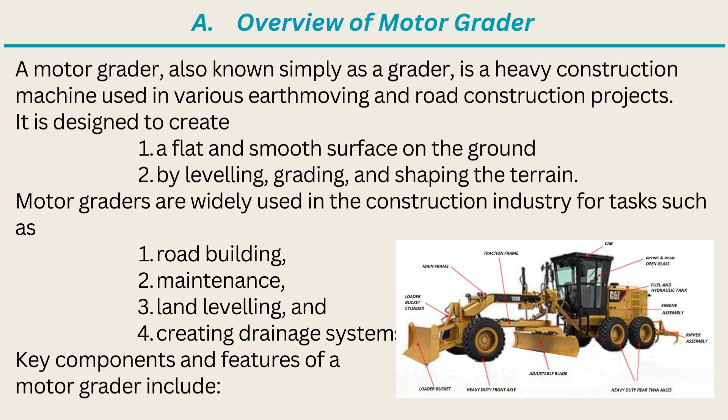A motor grader, also known simply as a grader, is a heavy construction machine used in various earthmoving and road construction projects. It is designed to create a flat and smooth surface on the ground by leveling, grading, and shaping the terrain. Motor graders are widely used in the construction industry for tasks such as road building, maintenance, land leveling, and creating drainage systems. Key components and features of a motor grader include:

1. Blade. The blade is the primary working component of a motor grader. It is a large, flat, and adjustable steel plate mounted under the machine's frame. The blade can be raised, lowered, tilted, and rotated to cut, move, and spread material. Motor graders typically have one main blade and sometimes additional front-mounted blades for more precise grading.

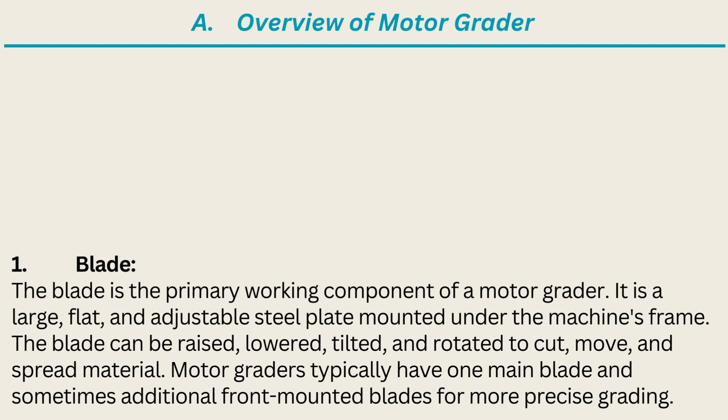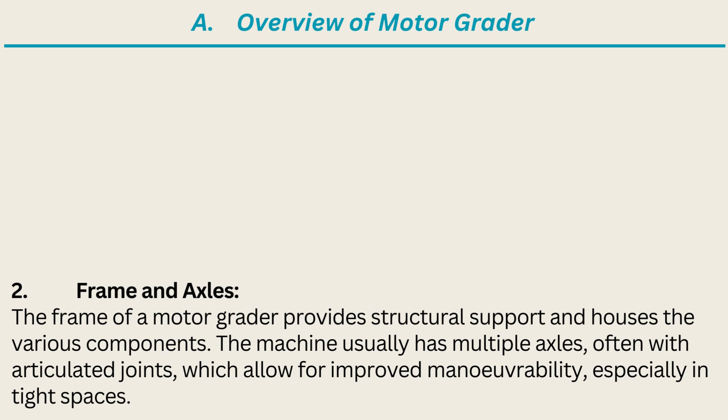2. Frame and axles. The frame of a motor grader provides structural support and houses the various components. The machine usually has multiple axles, often with articulated joints, which allow for improved maneuverability, especially in tight spaces.

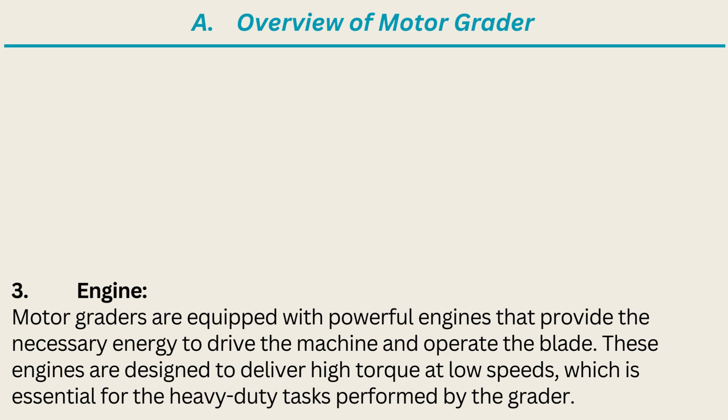3. Engine. Motor graders are equipped with powerful engines that provide the necessary energy to drive the machine and operate the blade. These engines are designed to deliver high torque at low speeds, which is essential for the heavy-duty tasks performed by the grader.

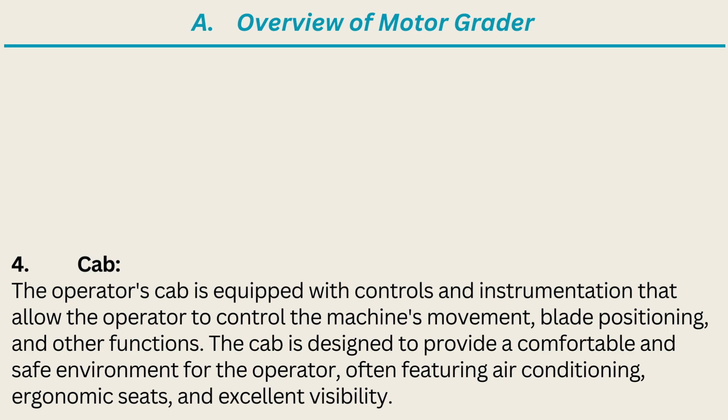4. Cab. The operator's cab is equipped with controls and instrumentation that allow the operator to control the machine's movement, blade positioning, and other functions. The cab is designed to provide a comfortable and safe environment for the operator, often featuring air conditioning, ergonomic seats, and excellent visibility.

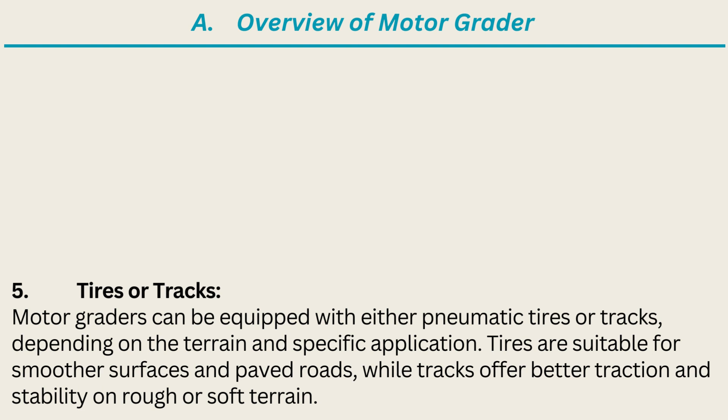5. Tires or tracks. Motor graders can be equipped with either pneumatic tires or tracks, depending on the terrain and specific application. Tires are suitable for smoother surfaces and paved roads, while tracks offer better traction and stability on rough or soft terrain. 6. Hydraulic system.

The hydraulic system powers the blade's movement, allowing it to be raised, lowered, and angled as needed. This system provides precise control over the grading process.

7. Ripper. Some motor graders have a rear-mounted ripper, a set of toothed shanks that can penetrate and break up compacted or rocky soil. The ripper is useful for preparing the ground before grading.

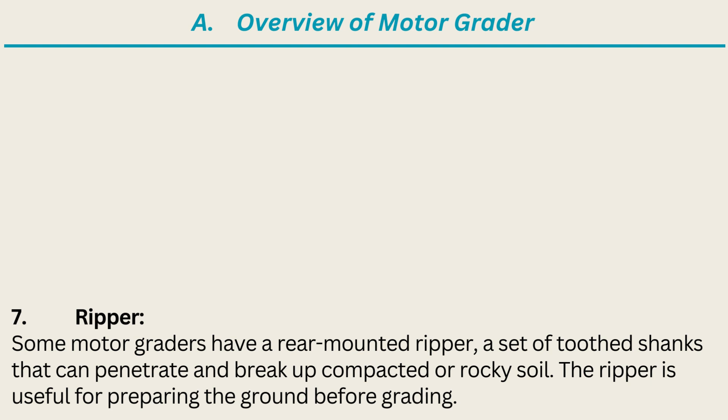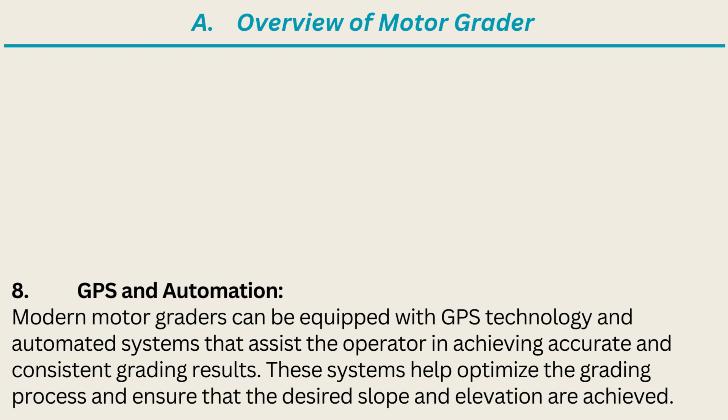8. GPS and automation. Modern motor graders can be equipped with GPS technology and automated systems that assist the operator in achieving accurate and consistent grading results. These systems help optimize the grading process and ensure that the desired slope and elevation are achieved.

Motor graders should be operated by skilled operators to achieve the desired grade and finish. Their versatile capabilities make them essential tools in various construction and road maintenance projects, contributing to the development of efficient and safe transportation networks. B. Components and systems of a motor grader.

A motor grader consists of various components and systems that work together to perform grading, leveling, and earthmoving tasks. Here's an overview of the key components and systems of a motor grader.

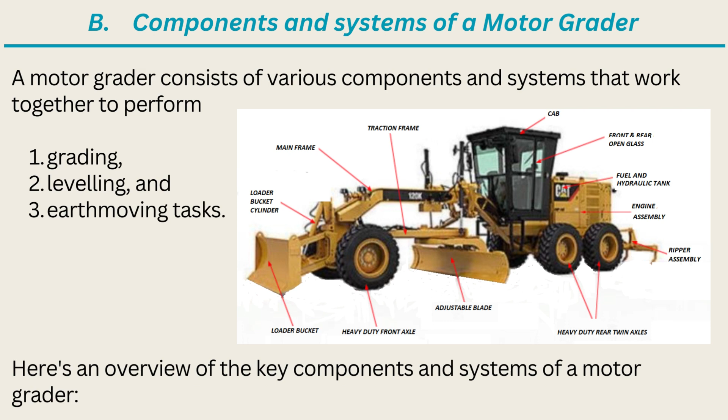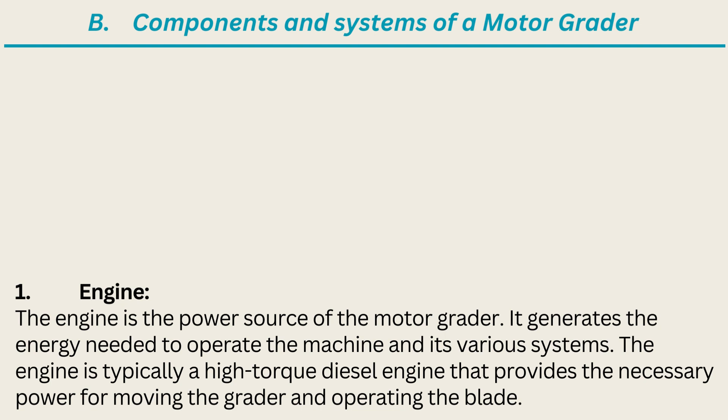1. Engine. The engine is the power source of the motor grader. It generates the energy needed to operate the machine and its various systems. The engine is typically a high-torque diesel engine that provides the necessary power for moving the grader and operating the blade.

2. Transmission. The transmission system transfers power from the engine to the wheels or tracks, allowing the motor grader to move forward, backward, and turn. It often includes multiple gears and can be manual, automatic, or a combination of both.

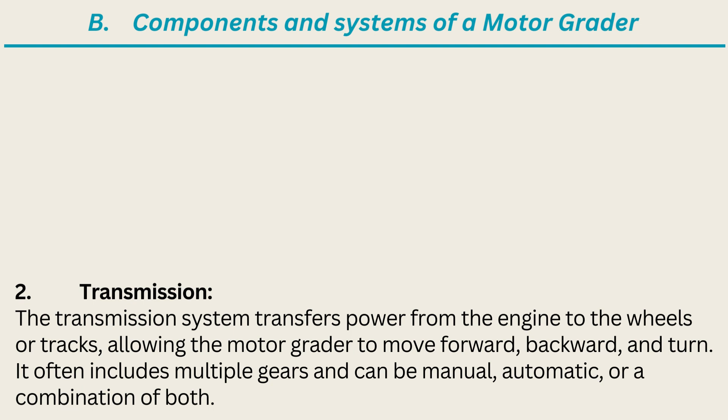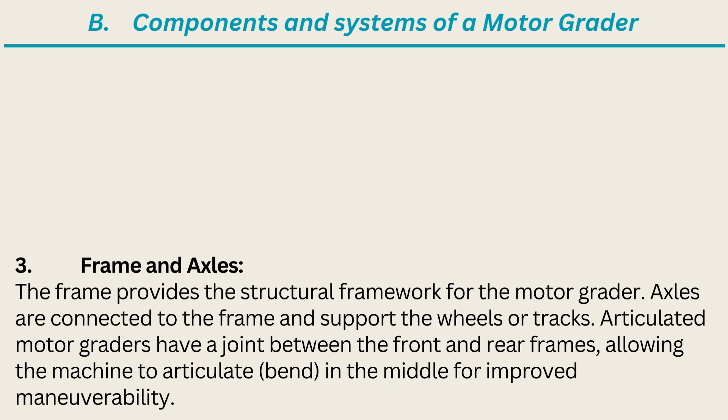3. Frame and axles. The frame provides the structural framework for the motor grader. Axles are connected to the frame and support the wheels or tracks. Articulated motor graders have a joint between the front and rear frames, allowing the machine to articulate, bend, in the middle for improved maneuverability.

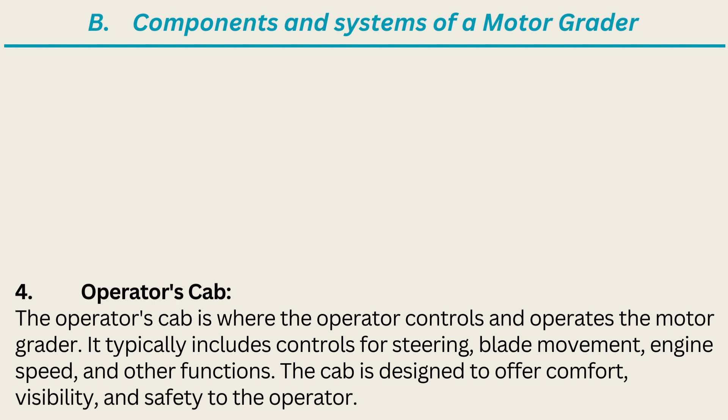4. Operator's cab. The operator's cab is where the operator controls and operates the motor grader. It typically includes controls for steering, blade movement, engine speed, and other functions. The cab is designed to offer comfort, visibility, and safety to the operator. 5. Blade.

The blade is the key working component of the motor grader. It is mounted under the machine's frame and can be raised, lowered, tilted, and rotated to perform grading and leveling tasks. The blade can be a single moldboard or a combination of front and rear blades.

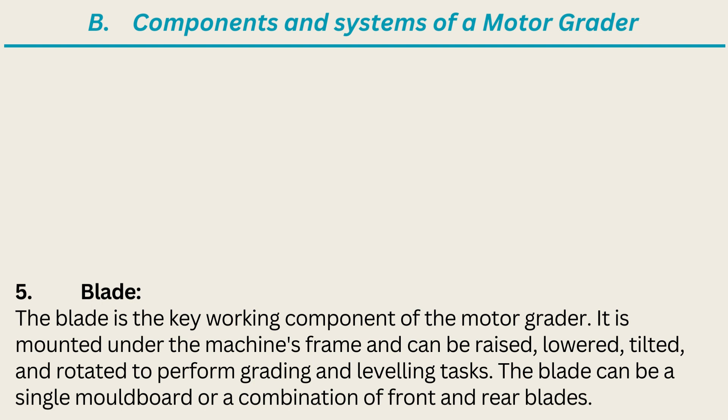Hydraulic system: the hydraulic system powers the movement of the blade and other attachments. It uses hydraulic fluid to generate force, allowing precise control over the blade's position and angle.

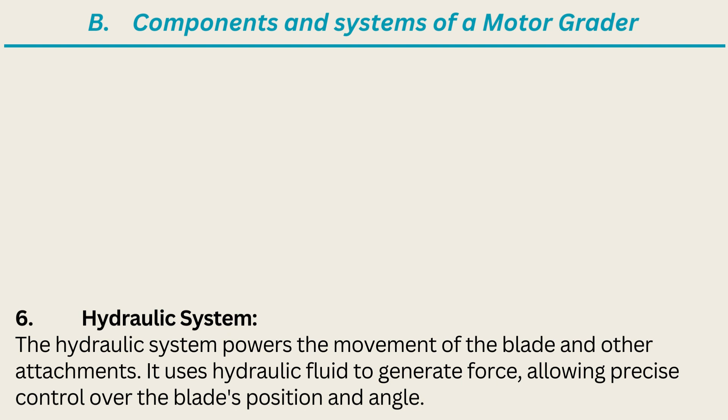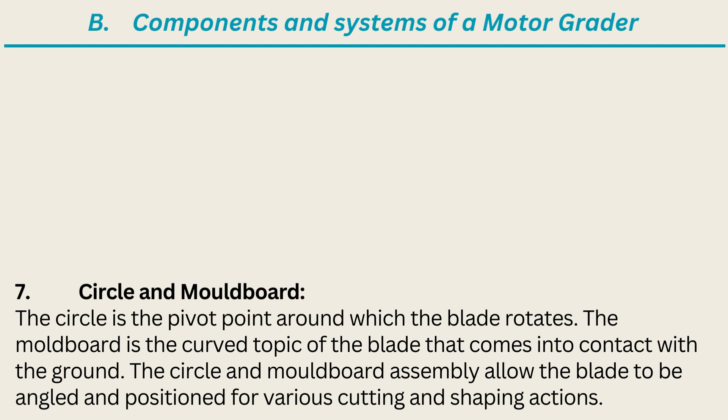Circle and moldboard: the circle is the pivot point around which the blade rotates. The moldboard is the curved part of the blade that comes into contact with the ground. The circle and moldboard assembly allow the blade to be angled and positioned for various cutting and shaping actions.

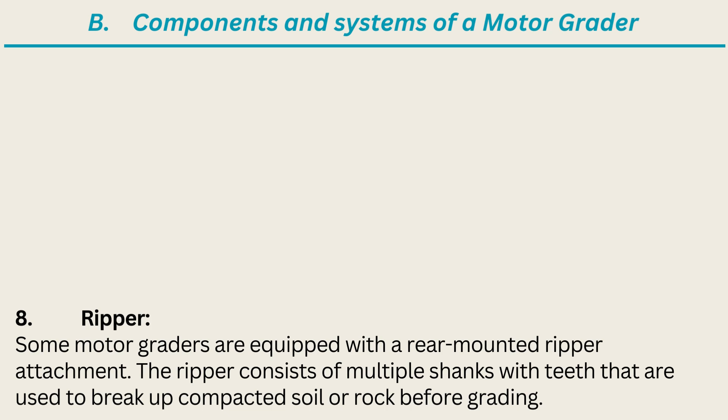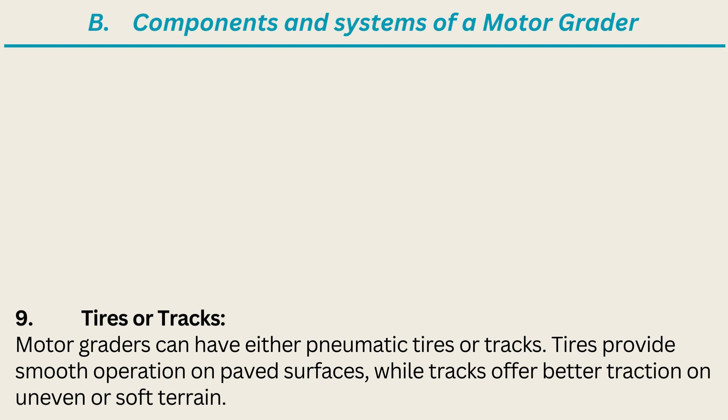Tires or tracks: motor graders can have either pneumatic tires or tracks. Tires provide smooth operation on paved surfaces, while tracks offer better traction on uneven or soft terrain.

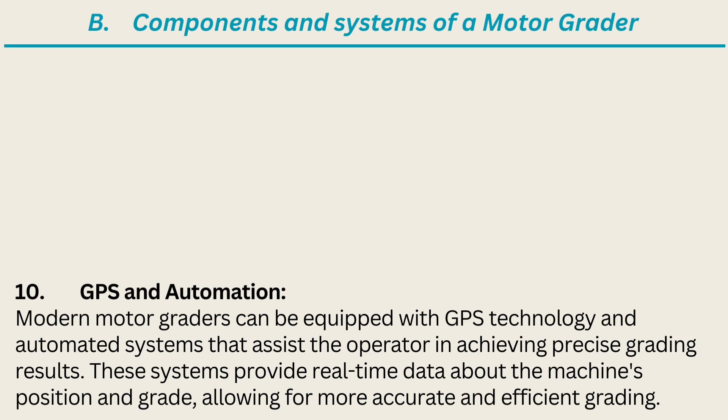GPS and automation: modern motor graders can be equipped with GPS technology and automated systems that assist the operator in achieving precise grading results. These systems provide real-time data about the machine's position and grade, allowing for more accurate and efficient grading.

Cooling system: the cooling system regulates the temperature of the engine and other components to prevent overheating. It typically includes a radiator and a fan.

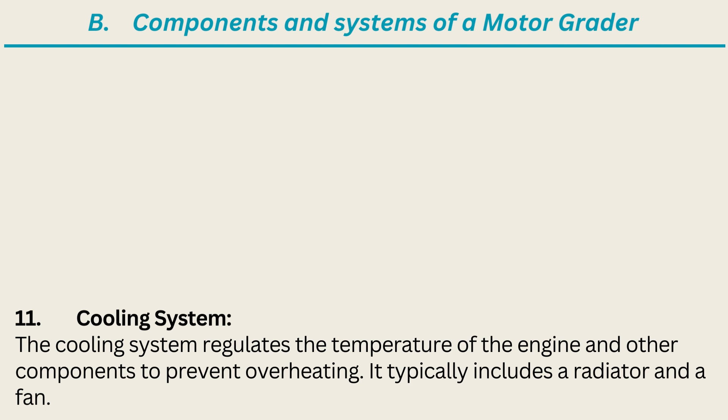Electrical system: the electrical system powers various components, including lights, gauges, controls, and electronic features in the operator's cab.

Brakes: brakes are important for controlling the motor grader's speed and stopping safely.

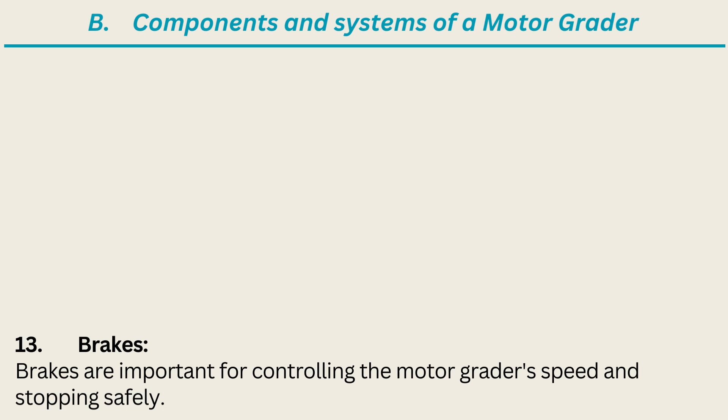Steering system: the steering system allows the operator to control the direction of the motor grader. Articulated graders often have unique steering mechanisms that enable them to bend in the middle.

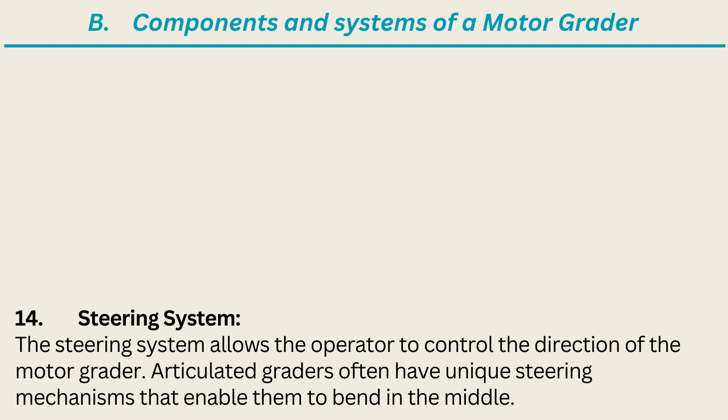Exhaust system: the exhaust system removes waste gases produced by the engine and directs them away from the operator and the machine. These components and systems work in harmony to enable motor graders to efficiently perform grading, leveling, and earth-moving tasks on construction sites, road projects, and other similar applications.

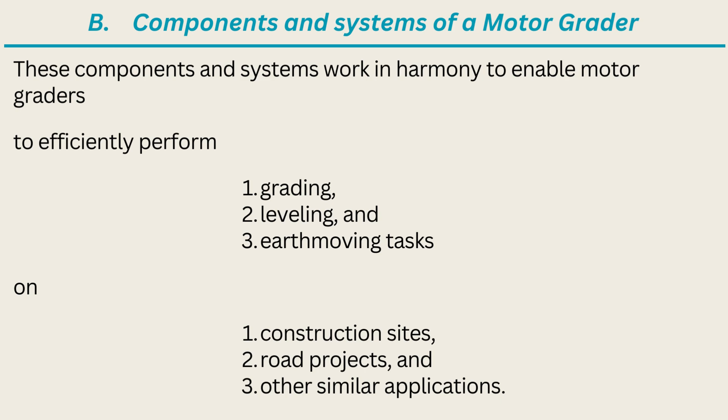Benefits of motor grader. Motor graders offer a range of benefits that make them essential equipment in construction, road maintenance, and earth-moving projects. Here are some of the key benefits of using motor graders.

Precise grading and leveling. Motor graders are designed to provide precise control over grading and leveling operations. Their adjustable blades and hydraulic systems allow operators to achieve accurate slopes, elevations, and smooth surfaces, ensuring proper drainage, road safety, and overall project quality.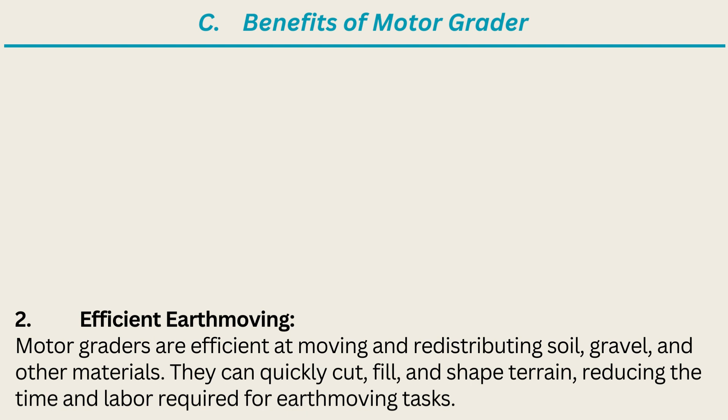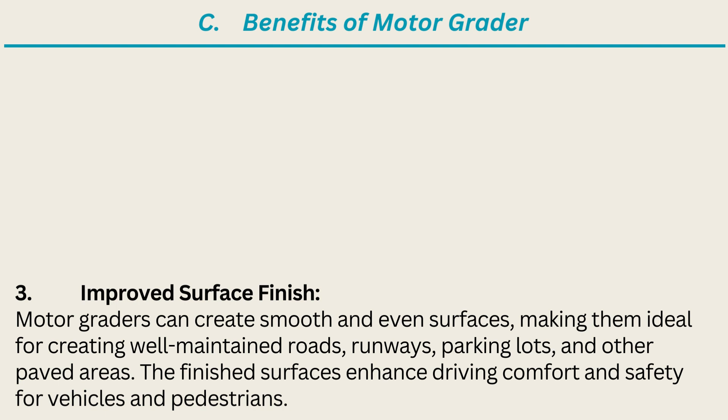Improved surface finish: motor graders can create smooth and even surfaces, making them ideal for creating well-maintained roads, runways, parking lots, and other paved areas. The finished surfaces enhance driving comfort and safety for vehicles and pedestrians.

Enhanced safety: well-maintained roads and surfaces contribute to safer driving conditions by reducing potholes, ruts, and uneven surfaces that can lead to accidents. Proper grading and drainage also help prevent water accumulation, reducing the risk of hydroplaning.

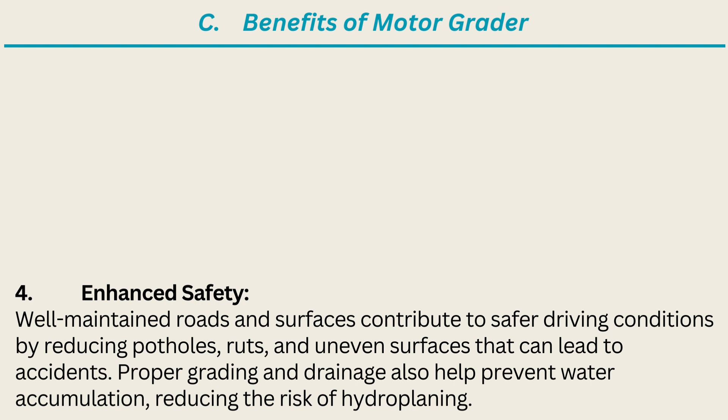Time and cost savings: motor graders are efficient machines that can complete grading and leveling tasks relatively quickly compared to manual methods. This efficiency translates into time and labor savings, ultimately reducing project costs.

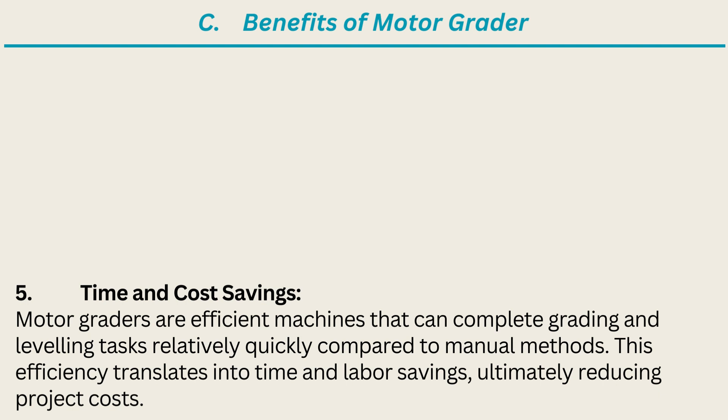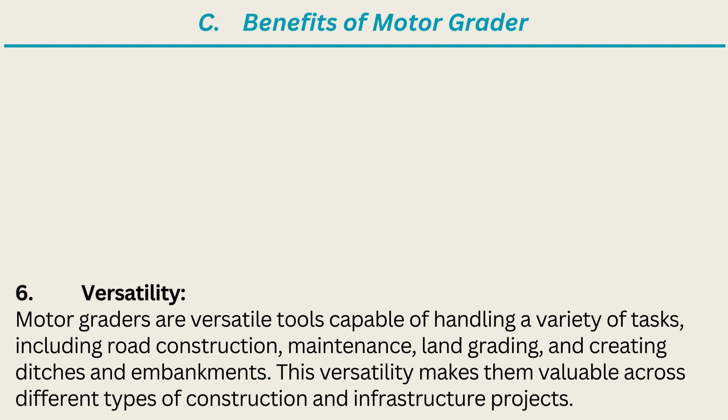Versatility: motor graders are versatile tools capable of handling a variety of tasks, including road construction, maintenance, land grading, and creating ditches and embankments. This versatility makes them valuable across different types of construction and infrastructure projects.

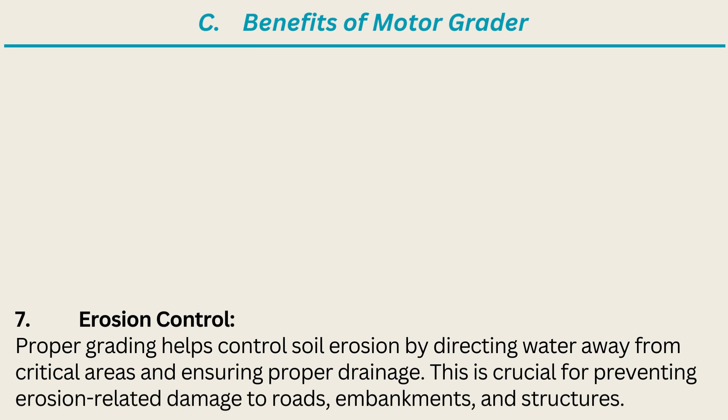Erosion control: proper grading helps control soil erosion by directing water away from critical areas and ensuring proper drainage. This is crucial for preventing erosion-related damage to roads, embankments, and structures.

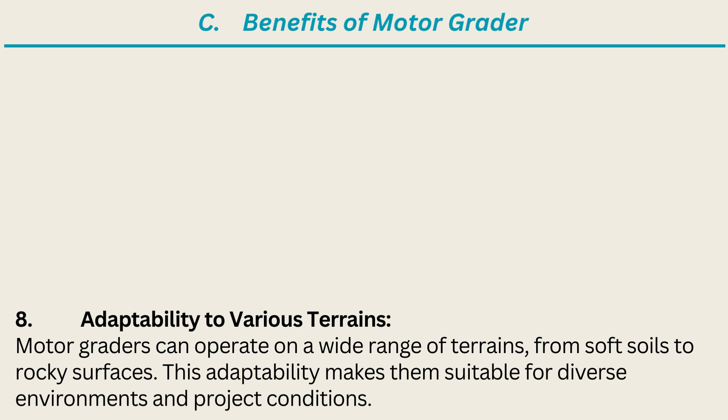Adaptability to various terrains: motor graders can operate on a wide range of terrains, from soft soils to rocky surfaces. This adaptability makes them suitable for diverse environments and project conditions.

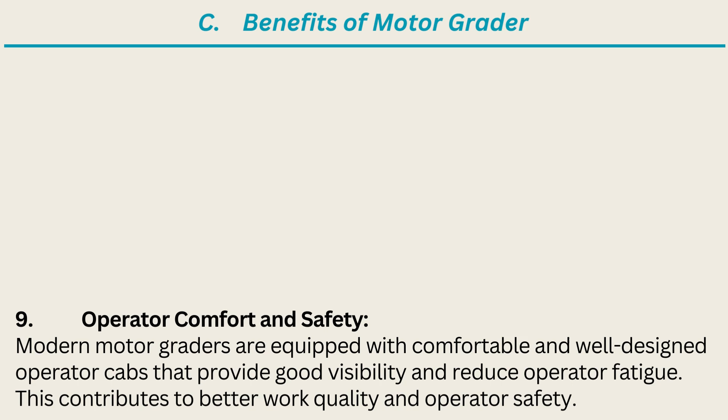Operator comfort and safety: modern motor graders are equipped with comfortable and well-designed operator cabs that provide good visibility and reduce operator fatigue. This contributes to better work quality and operator safety.

GPS and automation integration.

Many motor graders can be equipped with GPS technology and automation systems that enhance accuracy and consistency in grading operations. These technologies improve efficiency and reduce the chances of human error.

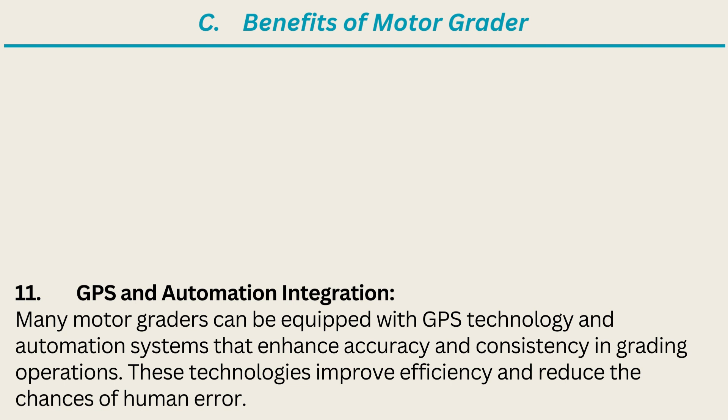12. Environmentally friendly. Efficient grading and leveling reduce the need for excessive excavation and fill, leading to less material waste and a smaller environmental footprint.

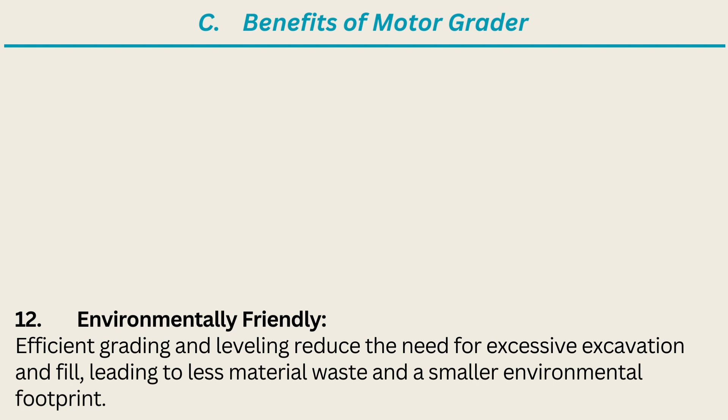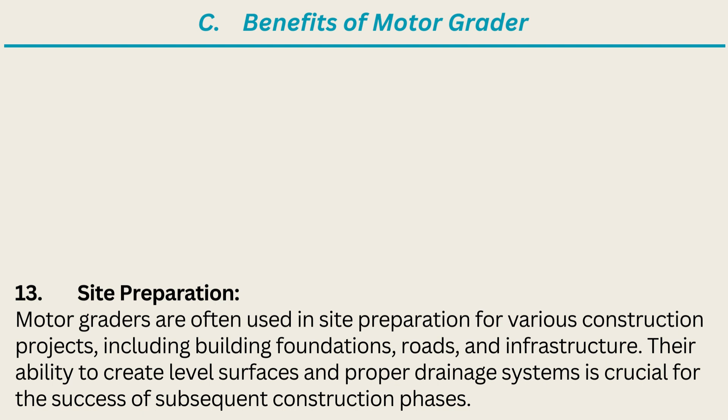13. Site preparation. Motor graders are often used in site preparation for various construction projects, including building foundations, roads, and infrastructure. Their ability to create level surfaces and proper drainage systems is crucial for the success of subsequent construction phases.

In summary, motor graders play a crucial role in achieving well-designed and properly maintained infrastructure, contributing to safer roads, efficient transportation networks, and overall project success in the construction and earthmoving industries.

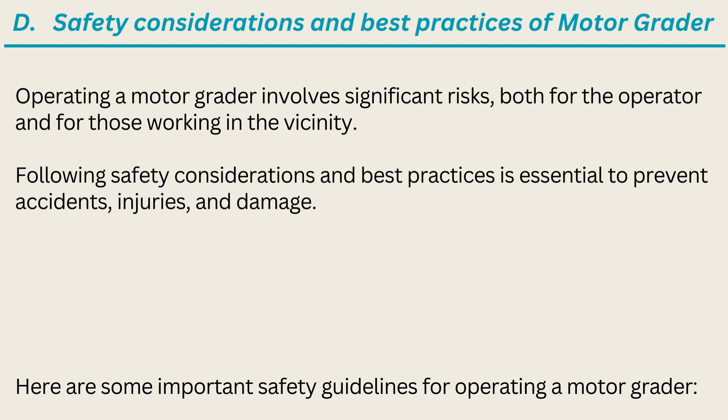D. Safety considerations and best practices of motor grader. Operating a motor grader involves significant risks, both for the operator and for those working in the vicinity. Following safety considerations and best practices is essential to prevent accidents, injuries, and damage. Here are some important safety guidelines for operating a motor grader.

1. Operator training and qualification. Ensure that operators are properly trained and qualified to operate motor graders. They should be familiar with the machine's controls, functions, and safety features. Ongoing training and certification are recommended.

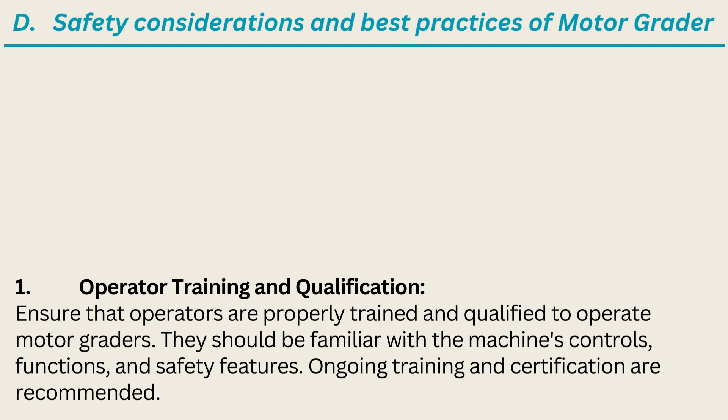2. Pre-operation inspection. Before starting work, conduct a thorough pre-operation inspection of the motor grader. Check for any mechanical issues, hydraulic leaks, tire or track conditions, and other potential hazards. Address any problems before operating the machine.

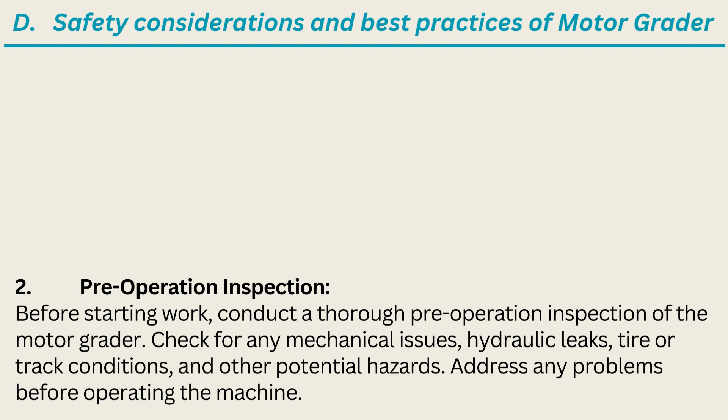3. Personal protective equipment, PPE. Operators and workers in the vicinity should wear appropriate PPE, including high-visibility clothing, hard hats, safety glasses, gloves, and steel-toed boots.

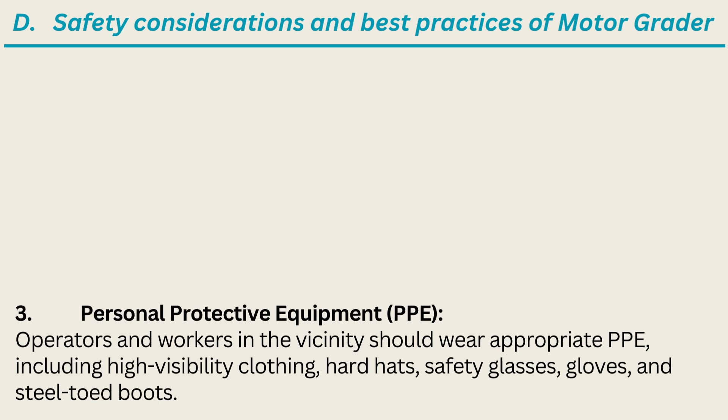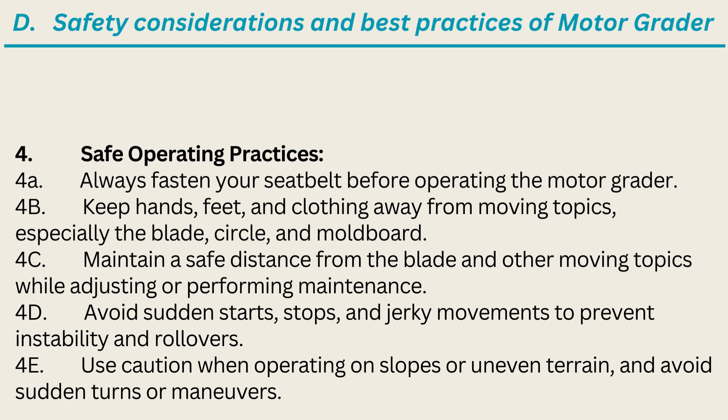4. Safe operating practices. 4A. Always fasten your seatbelt before operating the motor grader. 4B. Keep hands, feet, and clothing away from moving parts, especially the blade, circle, and moldboard. 4C. Maintain a safe distance from the blade and other moving parts while adjusting or performing maintenance. 4D. Avoid sudden starts, stops, and jerky movements to prevent instability and rollovers. 4E. Use caution when operating on slopes or uneven terrain, and avoid sudden turns or maneuvers.

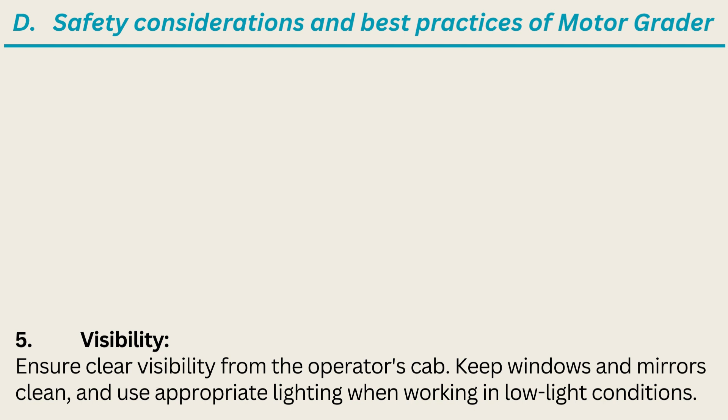5. Visibility. Ensure clear visibility from the operator's cab. Keep windows and mirrors clean, and use appropriate lighting when working in low-light conditions.

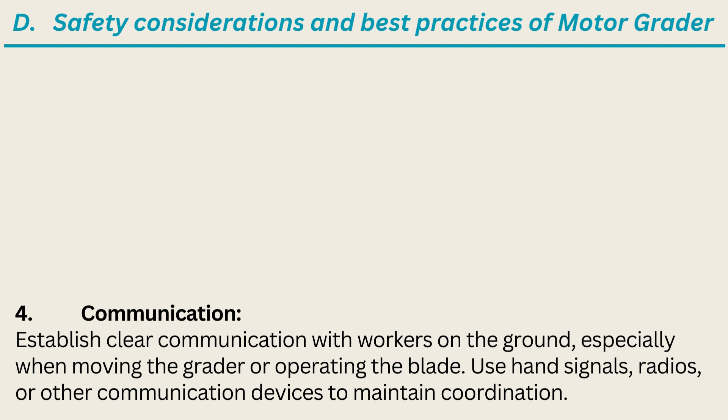4. Communication. Establish clear communication with workers on the ground, especially when moving the grader or operating the blade. Use hand signals, radios, or other communication devices to maintain coordination.

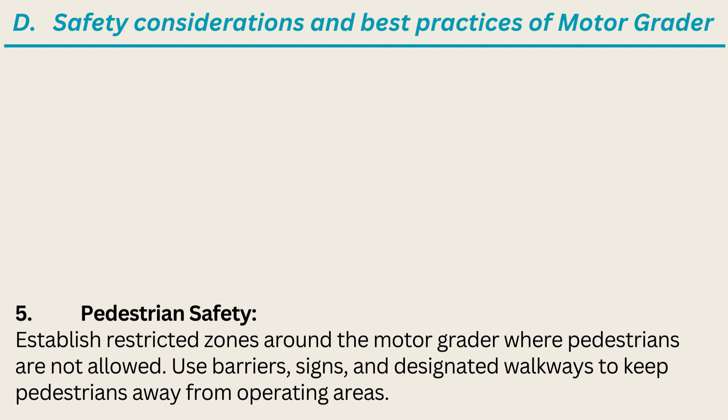5. Pedestrian safety. Establish restricted zones around the motor grader where pedestrians are not allowed. Use barriers, signs, and designated walkways to keep pedestrians away from operating areas.

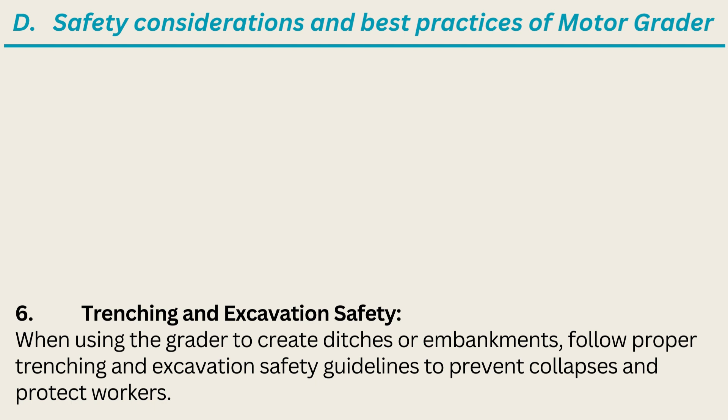6. Trenching and excavation safety. When using the grader to create ditches or embankments, follow proper trenching and excavation safety guidelines to prevent collapses and protect workers.

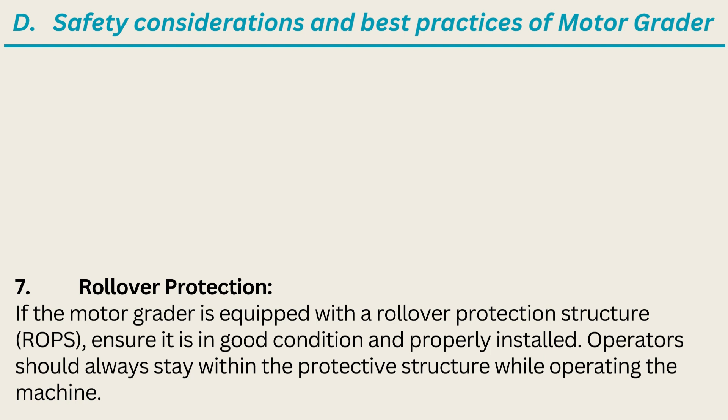7. Rollover protection. If the motor grader is equipped with a rollover protection structure, ROPS, ensure it is in good condition and properly installed. Operators should always stay within the protective structure while operating the machine.

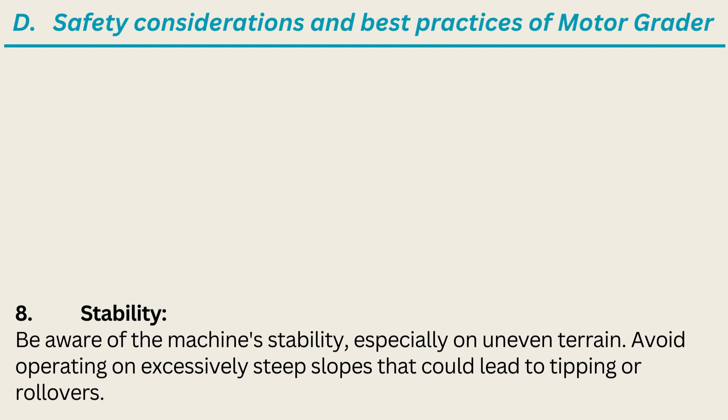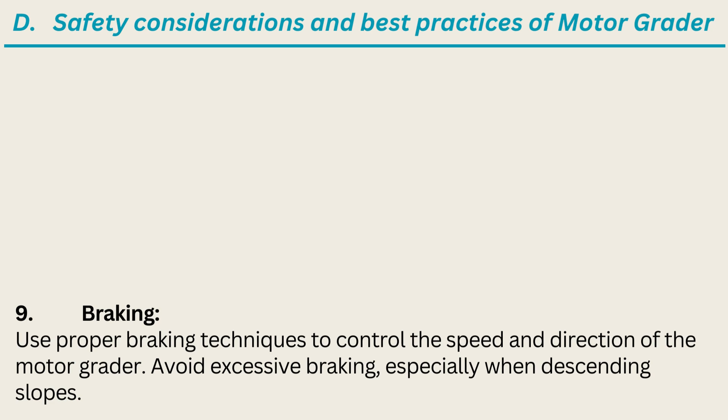9. Braking. Use proper braking techniques to control the speed and direction of the motor grader. Avoid excessive braking, especially when descending slopes.

10. Environmental considerations. Be mindful of environmental factors such as wet or icy conditions that can affect traction and stability. Adjust your operating practices accordingly.

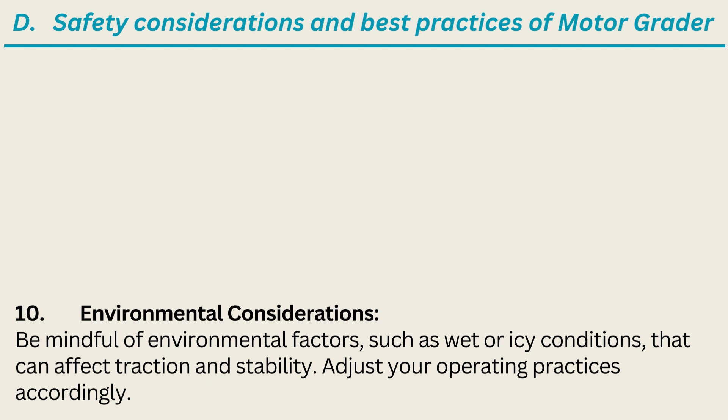11. Emergency procedures. Know how to shut off the engine and emergency procedures in case of accidents, fires, or other emergencies. Have a fire extinguisher and first aid kit on board.

12. Maintenance and inspection. Regularly maintain and inspect the motor grader according to the manufacturer's recommendations. Address any mechanical issues promptly to ensure safe operation.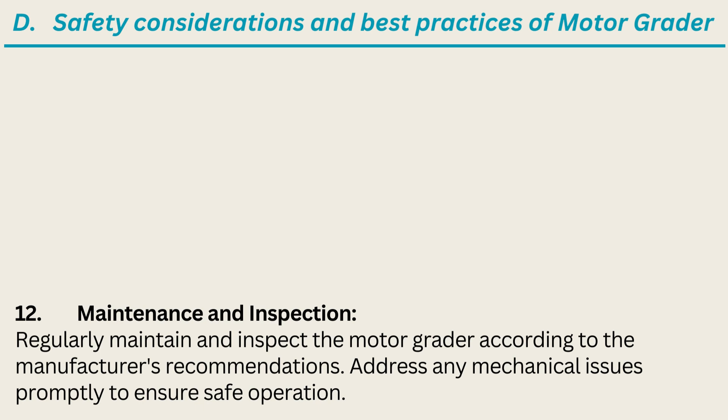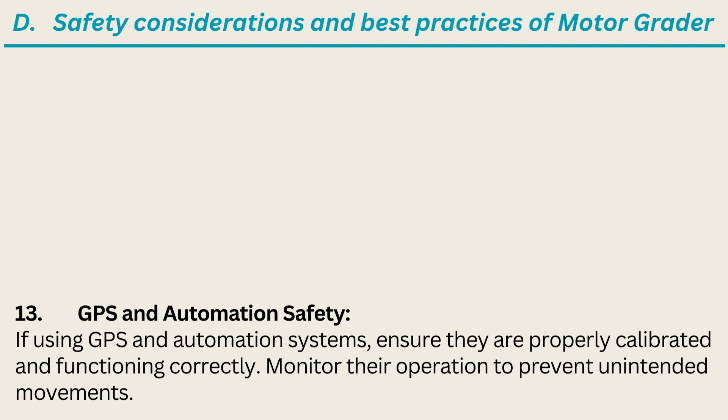Remember that safety is paramount, and taking the time to follow these safety considerations and best practices will help create a safer working environment for both operators and those working around the motor grader.

Friends, we have explained in brief about components and systems, benefits and safety considerations and best practices of motor grader.